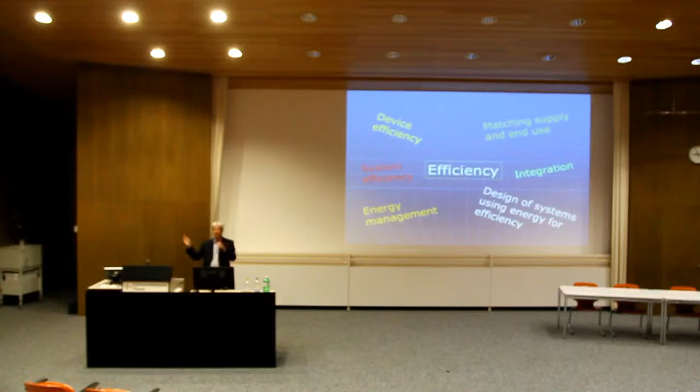You can locate industries together so that there's an easier cascading of wastes to uses in other industries, and so you leave larger areas of land unimpacted by industrial facilities. You could locate people along transport corridors that are set up for where they live and where they work so that you make mass transit far more easily used and far more efficient and effective than if you just let people live wherever they may develop and may choose to do so otherwise. So you can design systems like communities and cities to promote efficiency, and many communities are trying to do that as they develop.

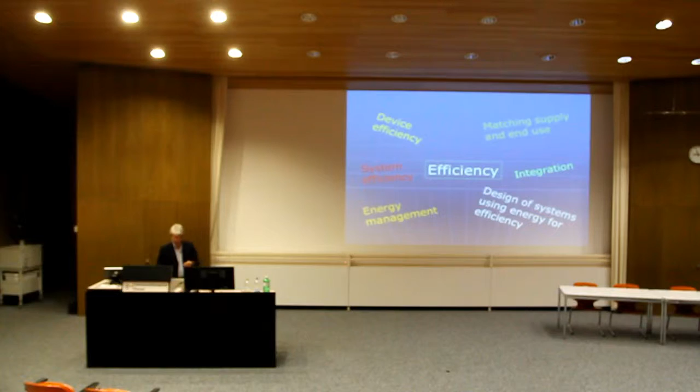That's number 3, efficiency in a broad sense. Number 4 is reducing environmental impact. Of course, to be more sustainable, there's a strong environmental part of that, and not impacting negatively or overly burdening the environment is a key part.

So greenhouse gases and associated climate change, one important factor. Using tools like LCA, life cycle analysis, some papers were presented at the conference on that, allow us to not just look at a snapshot of how things are operating, but look at the full life cycle to get the full environmental footprint. A better understanding of that is critical.

Carbon capture and sequestration, I put it there simply because it's contentious. The dream of the fossil fuel industry: find a way to economically capture and store, sequester somewhere, carbon dioxide so they don't need to worry about their contribution to climate change. They're trying. We have a couple large demonstration plants in Canada. It works, but can it be done on the large scale that we need to capture carbon emissions broadly, and can it really hold those emissions permanently, or will they eventually be released? Are big questions.

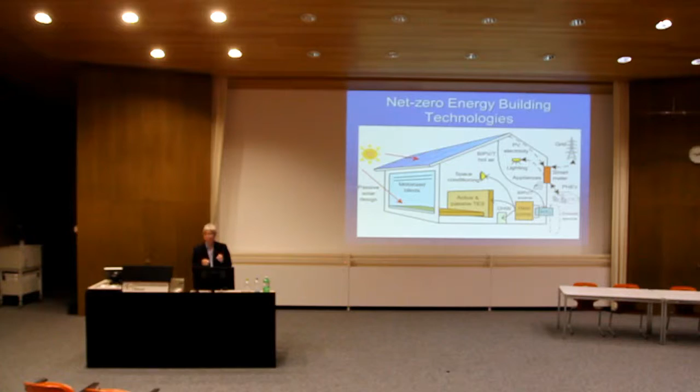You can run appliances off that, lighting, and hook that system up. You can also integrate photovoltaic electricity so it works its way into that grid. You could add wind to this, you could add other technologies. The idea is there's a large array of technologies we know how to work with today that can be put together, configured optimally for a given situation, to reduce energy use to zero or go to positive energy.

We're doing a lot of work on this in Canada. I'm part of a network—about a $10 million US network with about 16 universities, 30 professors, and maybe 200 researchers. NSERC is the funding agency for federal research in Canada, and the network is called the Smart Net Zero Energy Building Strategic Research Network.

We're looking at using computer controls to operate buildings and communities in the smartest way possible to achieve net zero energy use in those buildings. This is a strategic research network with a vision of turning 50% of Canada's building stock to net zero energy within 20 years. A lot of work going on there.

The 5 main themes of that research spell out some of the areas in need of research. This project was vetted internationally—we had researchers from Asia and Europe on review teams that had to assess whether it gets funded or not.

Integrated solar and HVAC—heating, ventilating, and air conditioning—systems for buildings is a key area of research, to integrate the technologies to get the biggest benefit. Active building envelope systems and passive solar technologies: we have researchers working on insulation for buildings, on window systems that are better in terms of energy efficiency, and all sorts of other passive storage techniques.

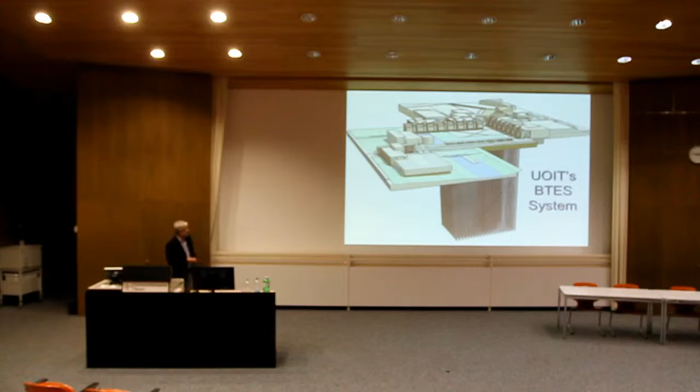Looking at that a little more, this is what goes on in 4 of those 200 tubes. Fluid comes in, goes down 200 meters, turns around, and comes up the same tube—it's a U-shaped tube. So the heat exchange occurs across the wall here.

There may be water around the tube, or a grout material that conducts well, and the heat basically goes into the overburden, shale, and then limestone—most of what's underneath is limestone here. There may be a water table, but you can design around that.

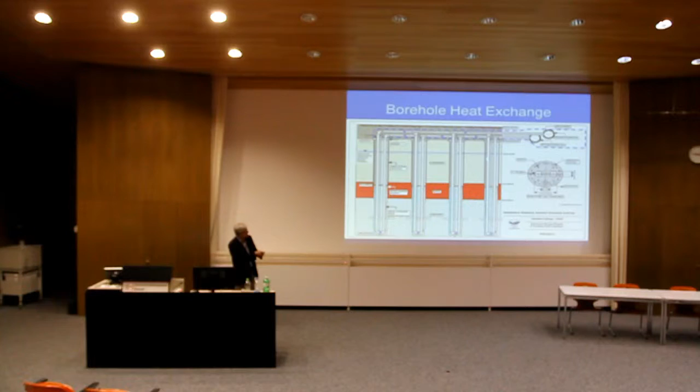We store the heat or the cool in the surrounding rock mass, and when we want it back, we put, say, a cool fluid through, and the heat is drawn in because the temperature is lower—we recover the heat and send it back for use. So that's one hole, a top view of it. The U-tube is the plastic tube going up and down. 4 are shown here, 200 in total.

What's the impact of this? And the economic question always comes up. This was a beautiful system because it made sense, and it's indicative of the typical problem that energy technologies face: to be efficient, they usually require a large capital fund up front, but they pay off through lower energy costs over their lifetime.

And that's fine, but nobody ever has the money available up front. Being a new university, we had the money up front. We didn't have students saying don't spend the money on this system, put it in the classroom. We didn't have any faculty saying don't spend the money here, put it into labs. So, since it made sense in the long run, we did it.

Savings in energy are about 40% reduction in heating costs and 16% reduction in cooling costs. Indirectly, there are other savings: there's no need for a boiler plant, so they never bought one. Potable water and chemical treatment are not needed, and rooftop cooling towers and the physical support in the building to support those were not required—so those were additional savings.

The payback, for economists: the high efficiency part of the system on the HVAC side had about a 3 to 5 year payback period.

The well field, the 200 holes going into the ground, had about a 7 to 8 year payback period. Overall, the system had about a 5 year payback period. For most business people, that's way too long to wait. Nobody's going to invest money and wait 5 years just to break even and then save money after. But for a facility like this in a university that's going to be there for, some universities are 800, 900 years old, a long time, it makes sense.

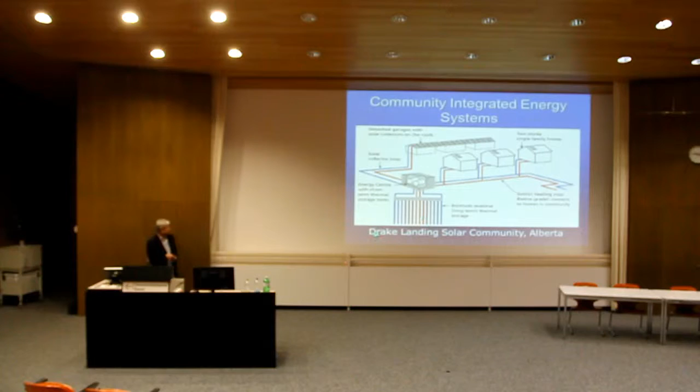Another example is community integrated energy systems. I mentioned I would come back to one. This is an interesting community in Alberta, Canada. Alberta, Canada is on the west side of Canada. It's a province. This is located actually near the city of Calgary. For those who know Canada, that's the fossil fuel center of Canada. The province of Alberta has most of Canada's fossil fuels. But they're still trying something like this.

This is an integrated community system. It has homes, two-story single-family homes, each with a separate garage. Solar collectors on the garage roofs. Small solar collectors for domestic hot water on each house. They're all hooked up with a district heating loop. And there's 2 energy storage facilities: short-term water energy storage tanks for heat, and long-term storage in the ground, like the example at my university.

The short-term tanks give you the ability for quick response. Getting heat into the ground takes more time, and recovering it takes more time. So we have this hooked up. There are 52 homes, and those homes are situated in a larger community of 1,000 or 2,000 homes.

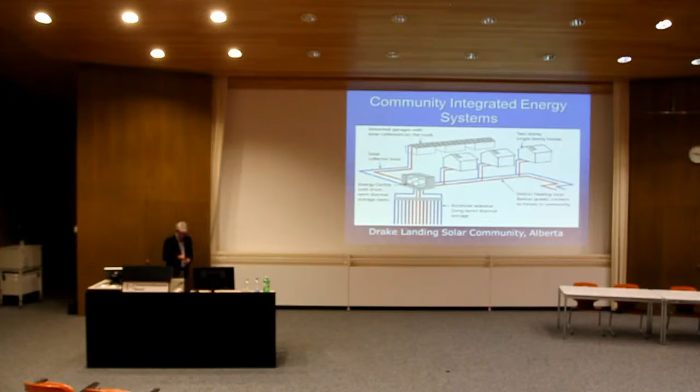And it was built. It's been talked about worldwide. There's a picture of it. Here are the individual homes with their solar collectors for hot water. Here are the separate garages with the large thermal collectors, sorry, not photovoltaic. Calgary is located near the Canadian Rocky Mountains, so those are the Rockies you see in the background. This is a larger community. These are 52 homes on 4 streets,

sold in the same way as the other homes. So they've done surveys. People were just as happy in these homes with how they felt versus the other homes. There was no difference. The government subsidized this to make the cost the same because it was more of an experiment. It's done what it was supposed to do. It's achieved 90% solar heating, solar fraction of heating. So they only use fossil fuels for 10%.

The designers are looking at Drake Landing number 2, the second phase of this. They said, it was nice, but we could get much better economics if we designed for about 1,000 or 2,000 homes. And so they're looking at that now, and the government's considering funding an entire community like this built in a centralized manner.

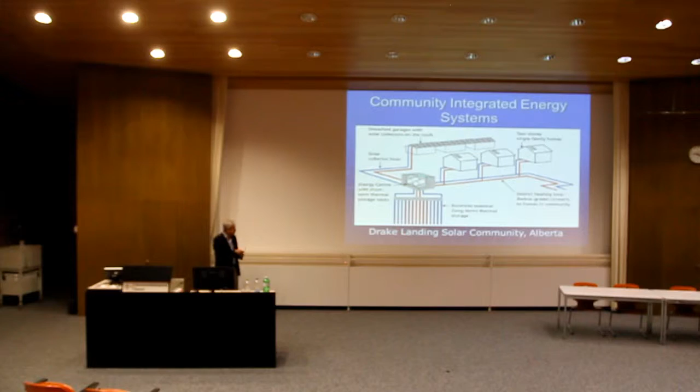If I go backwards, the importance of the community here is this is shared. Everybody has their own collectors, but they're shared. They support a common storage mechanism for all 52 homes. This can be sized for 500 homes, maybe with different modules to achieve better economics.

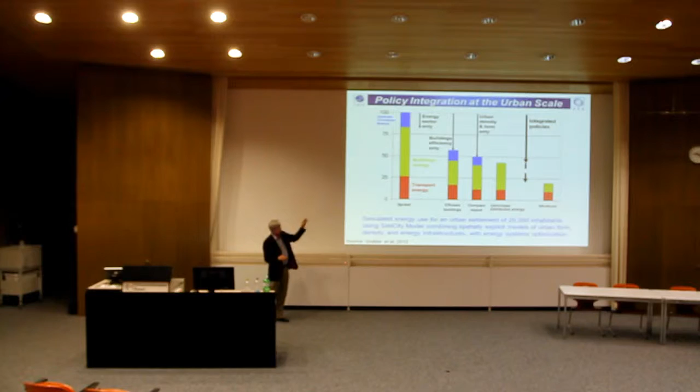I was part of, and the perspective is, can technologies do it all? No, there's more to it, so I don't want to leave that out. This is a perspective of one researcher, Grubler, work done in 2012, but it was used as part of the GEA. Some of you might be familiar. Global Energy Assessment was a large energy assessment we published about 2 years ago, the final report after about 5 years of work, done by about 2,000 researchers from around the world under the auspices of IIASA, International Institute for Applied Systems Analysis in Austria.

And so it was a global attempt to look at global energy use, assessments by country, what needs to be done to make energy use more efficient. I was involved in one part as one researcher. One of the important diagrams that came out that I thought would help here is this: if we simply leave cities to develop in a sprawling manner as they do without control, we use a certain amount of energy. A typical breakdown might be buildings using about half, transportation maybe 25%, and losses in the upstream conversion accounting for about 25%.

Present system, business as usual. If we go to more efficient buildings, predictions are we can reduce these numbers to about that level—cut the loss down, reduce building energy use, reduce transport energy use.

If we design further for compact layouts, so people don't need to travel so far to get from A to B on a normal commute to work, we can push down the energy use even more. Now we're at about 50% of what we started at.

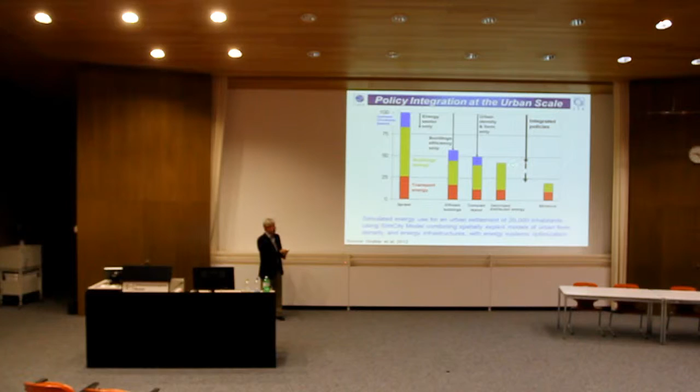So we go further. To go the next step though, policies—this won't happen on its own. It takes government incentives, maybe government support, because you have to pay up front and find the financing to build a lot of the technologies. But with integrated policies and support, the estimates were that you could reduce now to about 20% of the original number and get to about the minimum value that they could predict.

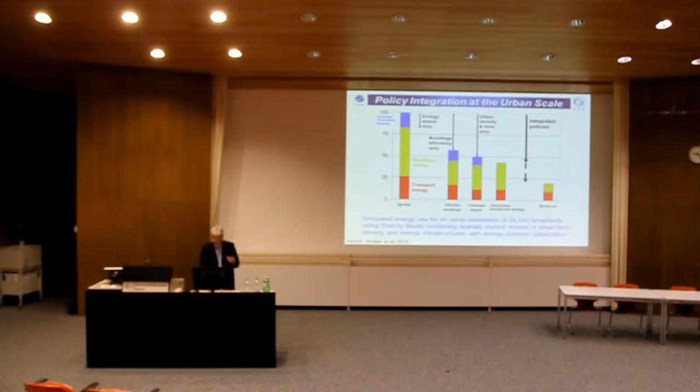This was based on a hypothetical 20,000 person community through modeling, but it is indicative of the types of ways we can reduce energy use in buildings, perhaps towards net zero.

So in closing, what have I tried to convince you of here? Well, sustainability is a critical quest, my starting point, which I think the conference is all about. Energy sustainability, I contend, is a key part of that—perhaps one of the most important parts, given the pervasiveness of energy use worldwide. And net zero energy buildings and net zero energy communities can play an important role, given how important building energy use is globally.

So that brings me to the end. I thank you for your attention, and I'm happy to answer questions if there are any, if we have time, of course. Are there any questions? Criticisms? Throw arrows if you want.

I'd like to know how long the underground pipes are supposed to last, and what would you do if they break?

The underground pipes are supposed to last 50 to 60 years. If they break, it depends—you can design them for more easy fixing, or you can design them for less easy fixing. For the 200 meter down ones, they've got individual sensors on the borehole, so they can identify if there's a leak and where it's happening. In some cases, if it's a bad leak, they may say it's economic just to cut it off from the system. In other cases, it may be a small leak—they can put some sort of sealant material into it, remove the actual pipe, and then reseal it. But they do sealant tests up front because they don't want that problem, so they do high pressure tests to ensure the integrity of the system before they go in. But of course leaks can develop, so they have options, but it can be problematic if a lot of the tubes go.